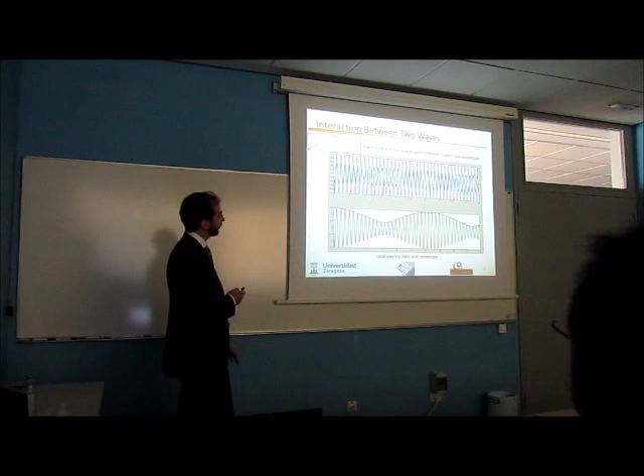To illustrate this situation, we show the electric field of two waves with different speeds and amplitudes, as in the ray tracing approach. And we can see that this is quite hypnotizing. Despite they move at different speed, when they go through this point, there is always full destructive interference. They have a phase delay of 180 degrees. And in this point, they are always in phase, constructive interference. So the period of this signal, which is a standing wave pattern, is simply the distance necessary to accumulate a phase delay of 2 pi.

In this work, we have adopted the modal theory approach for the reasons you will see later. Each mode is equivalent to a ray in the ray tracing approach. They are defined as the set of solutions to the boundary conditions of the waveguide and describe the arrangement of electric fields. They are indexed according to the number of maxima in the transverse direction. So the first mode has 1 maximum, the second mode has 2 maxima, and so on.

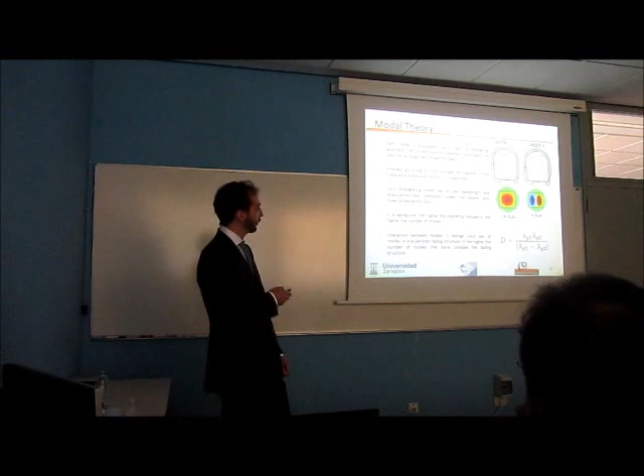Each propagating mode has its own wavelength and attenuation rate, and the so-called dominant modes are the ones with the lowest attenuation rates. In a waveguide, the higher the operating frequency, the higher the number of modes we will have propagating, and this interaction causes the fading. As in the previous case, we have multiple modes with different wavelengths interacting.

So it turns out that tunnels are modeled as rectangular dielectric waveguides, in which the wavelength has to be much smaller than the tunnel cross section to achieve communication range in the order of kilometers. This causes several modes to propagate, several interactions causing these fadings.

So in the literature, we have the near sector where multiple modes appear, and it's characterized by these fast fadings, and a far sector. Once the higher order modes attenuate, we have the lower order modes interacting, and this causes the slow fadings. In the literature, they say that sometimes they are periodic, sometimes they are not. And we are talking about fadings in the spatial domain. This is a signal that is stable in time.

So we were wondering, why are these fadings sometimes periodic and sometimes not? How can we obtain clean and predictable signals in this multipath environment, which we can use for navigation and localization? Are these fadings repeatable in different domains, space, time? How are these fadings in the cross-section? And how can we exploit this phenomenon?

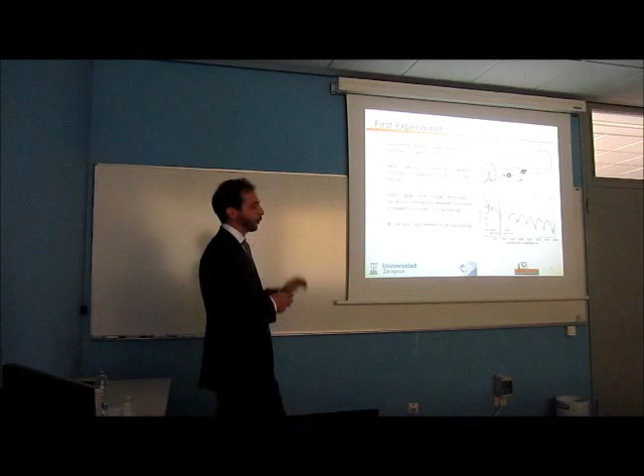So as a first approach, we put the transmitter antenna on one side of the tunnel and displaced the receiver up to 4 kilometers. We obtain this signal, which is quite nice. We observe, as in the literature, a near sector in which we can see the fast fadings, multiple interactions. Then we have a far sector with slow fadings, and in this particular case, at 2.4 gigahertz, we obtain these fadings with a period of 500 meters.

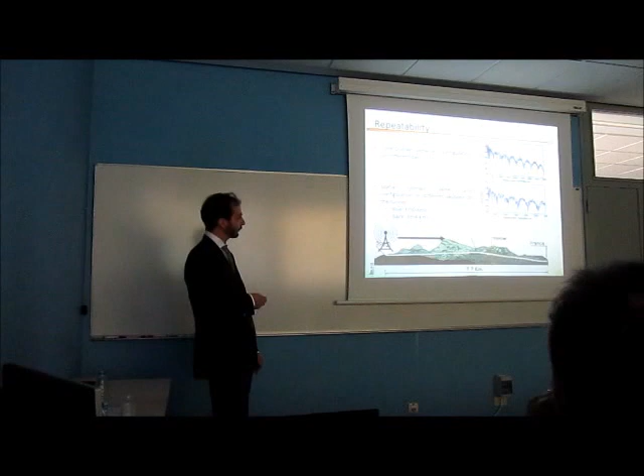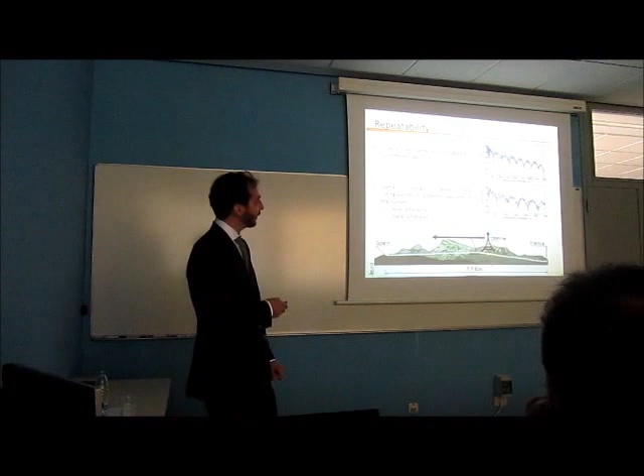So we were wondering if these fadings are repeatable. In the time domain, we use the same transmitter-receiver configuration on different days, and we can see that there is quite good matching between the signals. In the space domain, we use the same transmitter-receiver configuration in different sections of the tunnel. First, 3 kilometers from the entrance, and then 3 kilometers from the frontier. We didn't want to cross the frontier. And again, we can see how the signals, the power as a function of the distance to the transmitter, match quite well.

At last, we wanted to analyze the link symmetry, so we established bidirectional links, swapping transmitters and receivers. And again, we can see how the signals match quite well. So this is good news for our purposes.

Then we wanted to analyze the influence of both transmitters and receivers over the fadings. And to do so, we adopted the modal theory. So we modeled the tunnel as a dielectric rectangular waveguide in which the modes have a standing wave pattern in the cross-section. In the case of the Somport tunnel, due to the attenuation rates, the first three modes are the dominant ones, and each pair interacts and produces a fading structure.

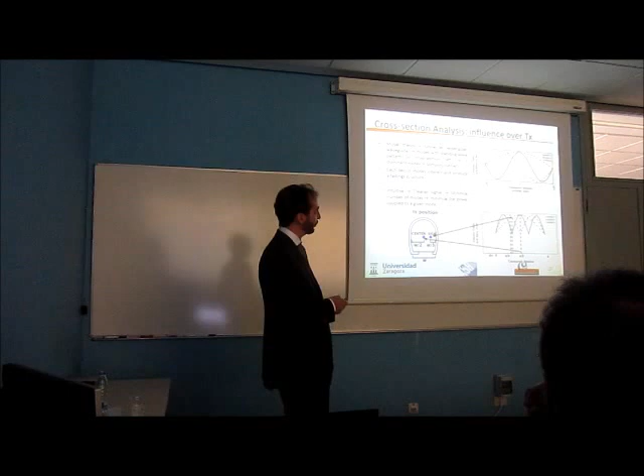So it's quite intuitive that to obtain a cleaner signal, you have to minimize the number of modes that interact to two, and that is accomplished by minimizing the power coupled to a given mode. So in this work, we have selected two positions: the center position that minimizes the second mode, and 1/3 from the tunnel wall, which minimizes the third mode.

So we place the transmitter on the side, transmitter on the center, and obtain these two signals. They are just shifted for clarity, they overlap. And we observe that they have different periods. If we go back to the formula of the period, we can see that it depends on the wavelength, and it turns out that in the tunnel, each mode has a different wavelength.

So in this case, modes 1 and 2 created periodic fadings of 500 meter period, and the first and third created shorter fading periods. On the other part, we place the transmitter in a place in which we have important power contribution of the three modes, and we can see how the signal is not strictly periodic. We have different fadings, different periods, so this is not as predictable as the others.

Then we analyze this phenomena at different frequencies. So we can see how at 2.4, 1.8 gigahertz, 868 megahertz, and 433 megahertz. Again, the same two positions, center of the tunnel, modes 1 and 3 in red, and side of the tunnel, modes 1 and 2 in blue. We can see that the lower the frequency, the lower the fading period, and the higher the attenuation rate. The periods match quite well with the rectangular waveguide approximation for this tunnel.

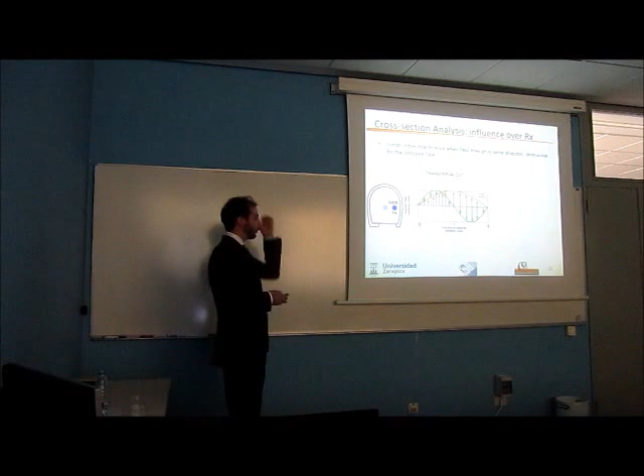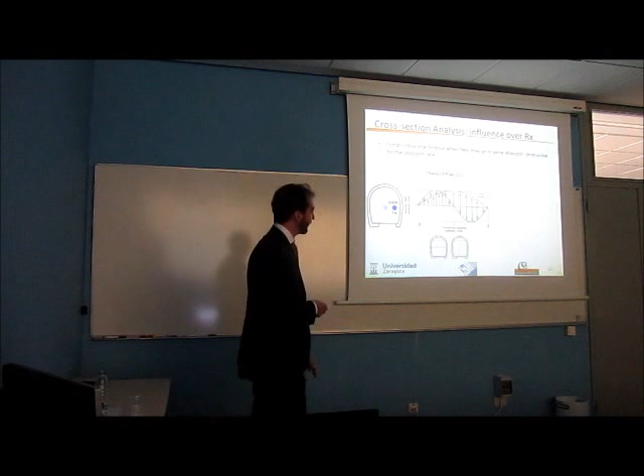So now we are going to interpret it with the electric field lines. So we see that if we place the antenna in the side of the tunnel, we have the first and second mode. What happens here? In one half of the tunnel, there is constructive interference, and in the other half of the tunnel, there is destructive interference. Remember that these modes oscillate in a wavelength distance, so it's going to be the same in the other positions. We place one antenna in each of the sectors, each half of the tunnel, and one antenna in the center of the tunnel.

We obtain the same 500 meter period of spatial delay as in the previous experiment at 2.4 gigahertz. And in the center of the tunnel, the mode has a minima, then the third mode becomes observable. But don't pay attention to this right now. So what is important is that the transversal structure is translating into a spatial phase delay between the phases.

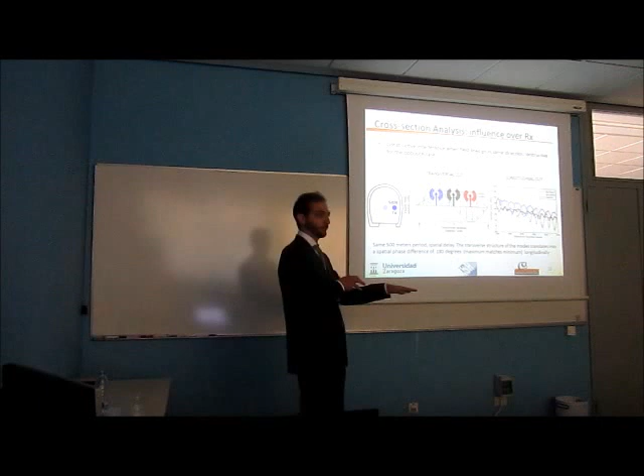Here we group the 12 antennas from one half of the tunnel and the 12 antennas in the other half of the tunnel. They are just shifted for clarity. We can see how in the same half the fadings have the same period, and the other half has the same period, and there is a phase delay between both signals. This can be clearly viewed with the upper view of the tunnel, so we can see that this half of the tunnel is in phase and has a phase shift, a spatial delay with respect to the other half of the tunnel. In a 3D space, this is more or less the situation. So one half of the tunnel, the other half of the tunnel, the period is the same in both, and they are shifted.

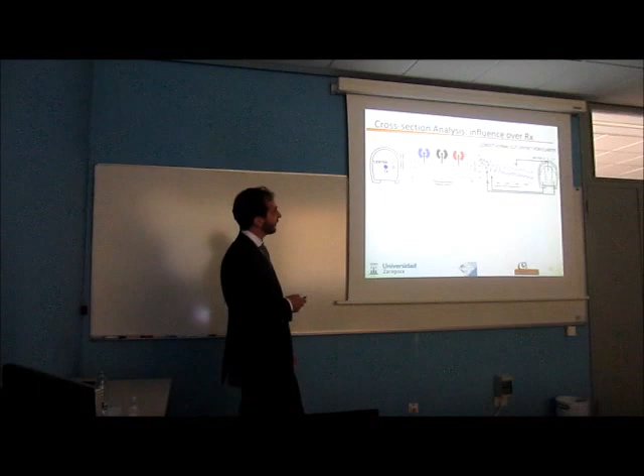We also see that if we place them in the center of the tunnel, we have the first and third mode interacting. So what happens here is that in the extremes, we have destructive interference while constructive in the center and vice versa. Again, we place one antenna in each of the sectors and obtain that the sides of the tunnel are in phase and they have this phase difference with respect to the center according to the spatial distribution. So, in the upper view, this is even more clear. We can see how the extremes are in phase and they have the phase delay with respect to the center. In a 3D space, this is more or less the situation again.

So in summary, to obtain clean and periodic fading, you have to promote the interaction between just two modes, and this is accomplished via the transmitter position tuning, minimizing the power coupled to the undesired modes. So we chose the center and 1/3 from the tunnel. And the transversal structure of the present modes actually translates into a phase difference of 0 or 180 degrees in the longitudinal phase.

So in this section, we study the longitudinal fadings, their repeatability, configurations to produce well-defined fadings, as well as the influence of the transmitter and receiver position on these longitudinal fadings. We also perform a study of the fadings in the transverse dimension.

So now, what can we use this for? Imagine a search and rescue scenario in which something happened inside the tunnel, humans are not allowed, and what do you do? You deploy a team of robots and stream data to a base station. For communication purposes, we have a multi-hop protocol developed by Professor Tardioli that Professor Almeida probably knows.

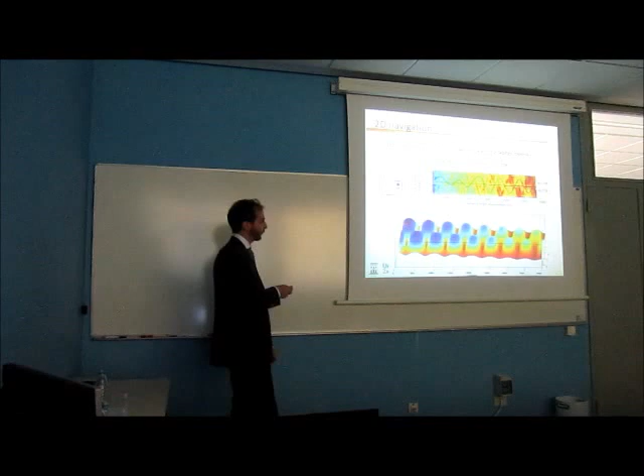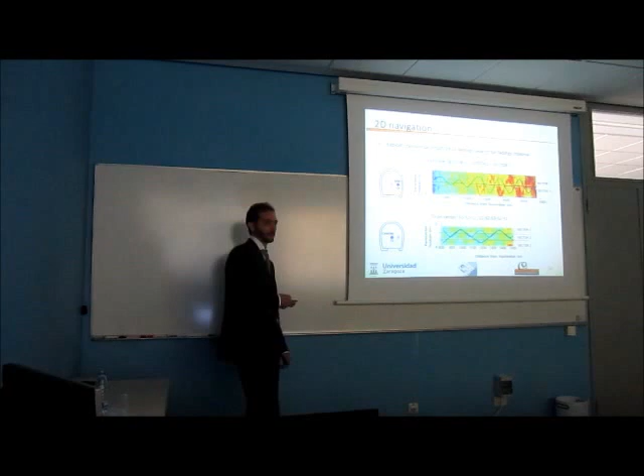If we place the transmitter in the center, then we have the tunnel divided in three, and we have the same situation as in the other, or we can do it in one half of the tunnel: first sector, center, first sector, center, or the combinations possible. This is for clarity, then we can see here how we have to go from one half of the tunnel to the other, going through the center, or within one half.

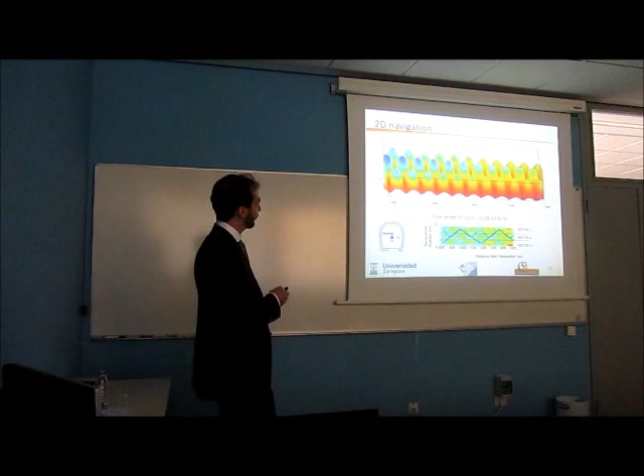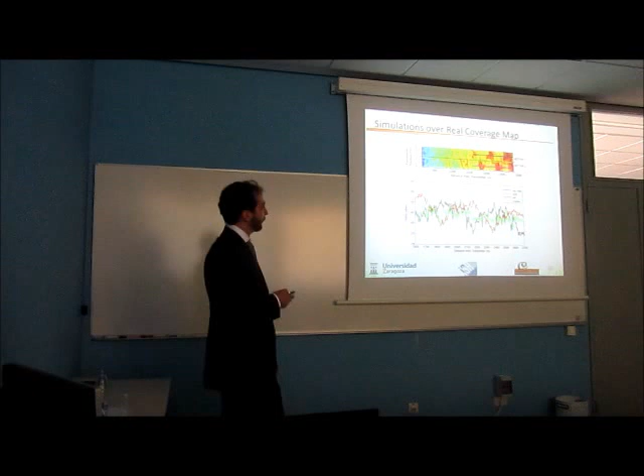So we did some simulations over the real coverage map built in the previous chapter. So we see that if we travel in straight lines in one half of the tunnel or the other, we see these 500 meters fadings. If we go through the center, we have the third mode, less fadings, but we could take advantage of the fadings maximum. So we can see how our zigzag navigation technique obtains the best quality links in comparison to all the other situations.

At last, we wanted to facilitate the navigation while improving the communication. So we proposed spatial diversity schemes. Let's remember that commercial spatial diversity is made to overcome temporal fadings. So they are made in the order of a few centimeters, one wavelength. However, in the tunnel, if we want to take advantage of this structure, we have to work in the order of half or 1/3 of the tunnel, which is decimeters to meters. So we have to implement large-scale spatial diversity schemes.

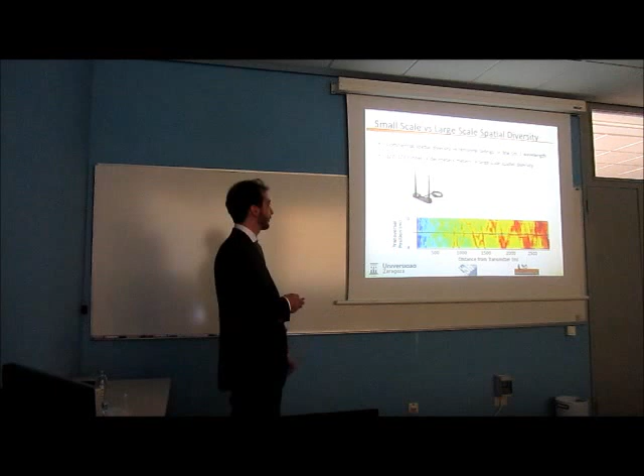In this experiment, we put two antennas together as in the commercial spatial diversity, and the other one far away. So we can see how the two antennas close together have more or less the same information, while with the other we have really different information. So what is actually relevant here is the position of the antennas, not just the separation between them. So we consider the case of having two halves of the tunnel, and what is relevant in this case is to keep one antenna in each half of the tunnel at all times.

Now we move into pipes, which is one of the other common tunnel-like environments. Actually, this was during a research stay at the University of Pennsylvania. They had a project for dam pipe inspections, and they needed to localize the quadrotor inside the pipe. So the problem with these scenarios, as we mentioned, is that they are much longer than they are wide. They are featureless in both vision and texture. They are repetitive, dark, slippery, so if you use wheeled robots, the wheels will tend to slide, and they are GPS denied. So all of this really hinders the accurate localization.

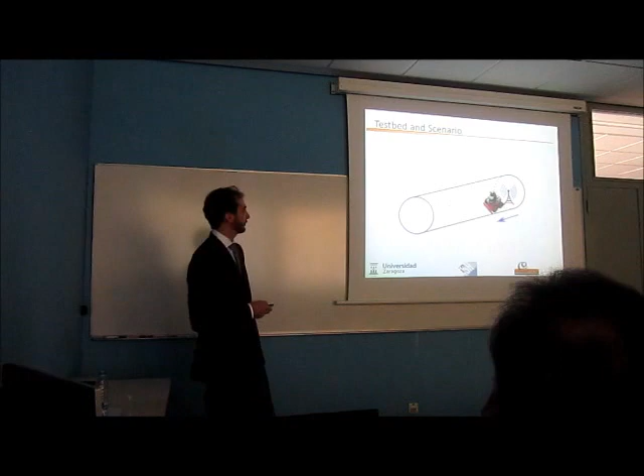So the procedure again was to place the transmitter at one extreme and displace the robot inside the pipe, measuring the received signal. So below the cutoff frequency, you choose a frequency which is below the first propagating mode, and we can see that there is a rapid attenuation. The pipe does not behave as a waveguide.

Then we selected a frequency between the first and second mode, so we are just propagating one mode. This is used for communication purposes because you obtain a clean signal with no fadings, but this wouldn't be useful for localization. There are some approaches that use the slope to localize in these scenarios, but the problem is that in metallic pipes the attenuation rate is of a few dB per kilometer, so you wouldn't be able to obtain it.

Then we studied that the interaction between the first and third mode, as in the case of the tunnel, will cause shorter period fadings than the first and second one. The problem is that when you propagate the first 3 modes, you also propagate the second one. So how can we get rid of this second mode? And we found the answer by analyzing the structure of the electric field. So the second mode has radial symmetry.

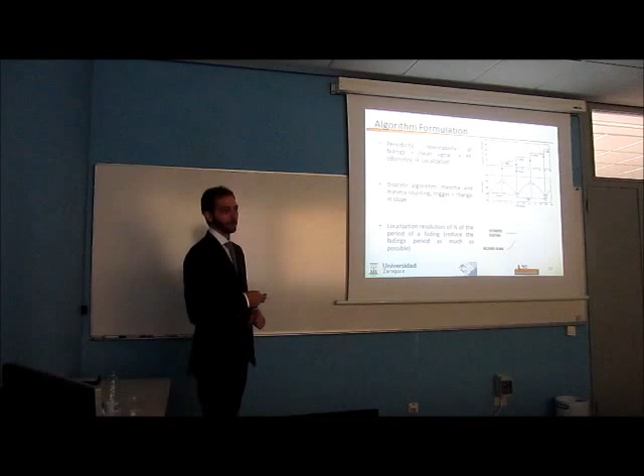At last, we said that we wanted to use these fadings to localize. As they are periodic, repeatable, and they are clean, we propose an RF odometry-like method for localization. So it's a discrete algorithm in which we just traverse the fadings and count the maxima and minima that have been traversed. So the trigger would be the change in the slope. This would give us a localization resolution of 1/2 of the period of these fadings. That's why we wanted to reduce the fading period as much as possible.

So what is important to say here is that we have two delays. One is associated to the moving average filtering. Although the signal is clean, we wanted to obtain a really clean signal, so we just added a 10 samples moving average filter. And there is another delay associated with perceiving the change in the slope: you have to traverse the fading. So actually, you know it after you traverse it.

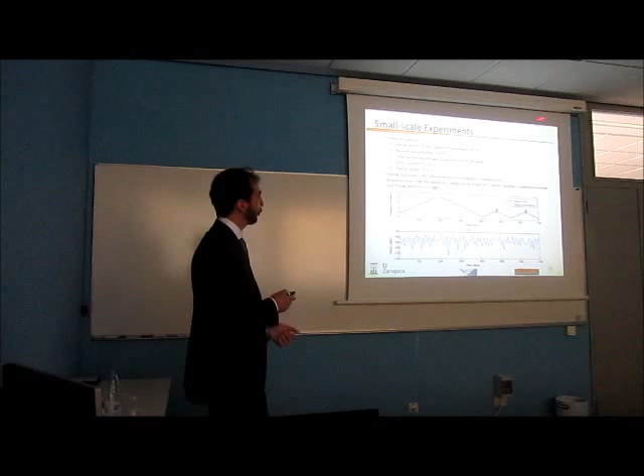As the fadings are stationary, there are no cumulative errors as in other methods like odometry. And the maximum error here occurs when you almost reach a fading, but you don't get to the change in the slope. So you don't get triggered, and it's 1/2 of the period of the fadings.

So to test these concepts on a more real scenario, we brought, with help of Professor Tucci, the Pioneer into the pipe, and we added structural landmarks each 10 meters. This was used to obtain a position estimation and ground truth for comparison purposes. So we can see how after 70 meters, the odometry accumulated a 6% error, while our method just 0.9% after the trigger.

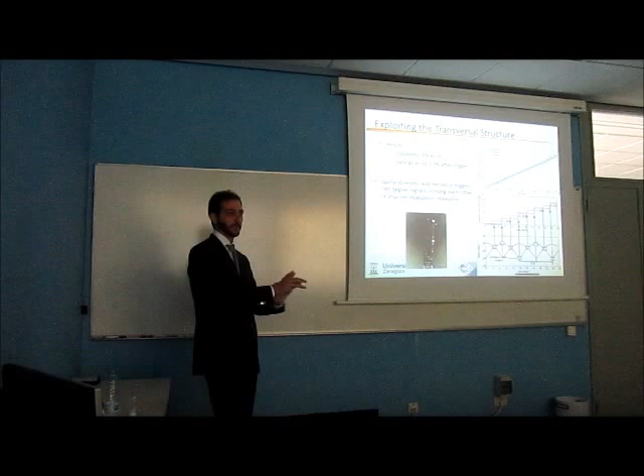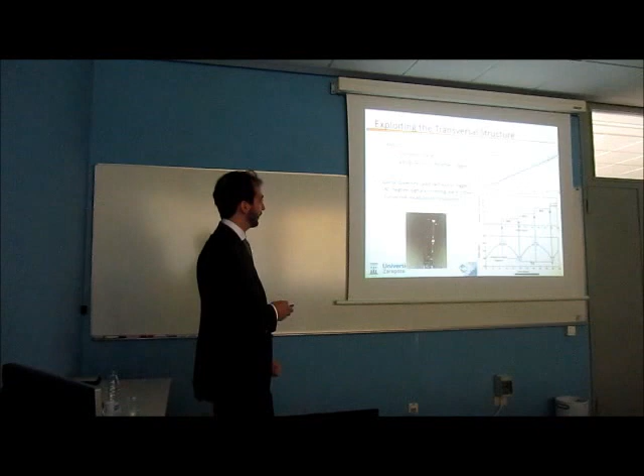But we wanted to exploit the spatial diversity here as well. So we can see that if we have one receiver in the upper half of the tunnel, while the other is in the lower half, we will have delayed signals, and we can add two more triggers where the signals cross each other. So this would allow us to improve the localization resolution, and we can see how there are the two signals. We have much more triggers and much more localization resolution.

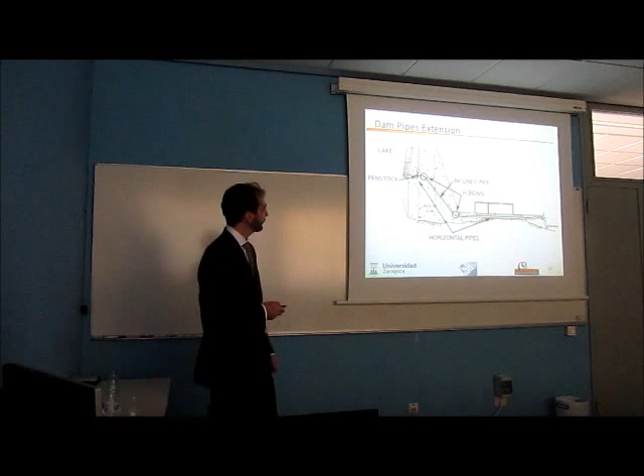So we wanted to contribute with them, and it turns out that pipes inside dams have different characteristics. So they have elbows, and they have one end closed, which is the penstock that prevents flooding the pipe. And we wanted to analyze if our method would work in this situation. So we used several pipes with different elbows: 90 degrees, straight pipe with 90 degrees, a corrugated pipe that is used for fan structures with 90 degrees, 90 plus 90 degrees, and 90, 180 plus 90 degrees.

So we can see how in all the cases, the period of the fadings is maintained before and after the elbow, and they match the theoretical period of the fadings. It seems here that this fading has a much more spaced period than this one, but no, it's because in this one we had less distance to cover, so it's the same period.

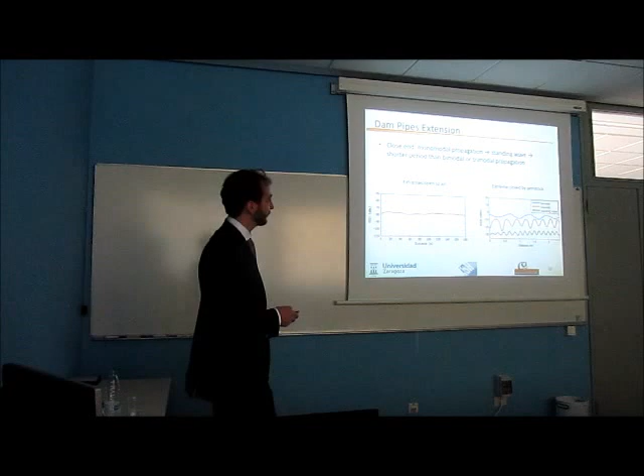And as for the closed end, we actually see the opportunity to use a standing wave pattern due to the monomodal propagation. So if the extremes are open to air in monomodal propagation, we have just one signal with no interference. The thing is that if we close one end, then we have an incident and a reflected wave, and it causes these fadings. So we can see how actually in this case, the standing wave period is shorter than the case of bimodal and trimodal propagation. So we could improve the localization resolution even more in this case.

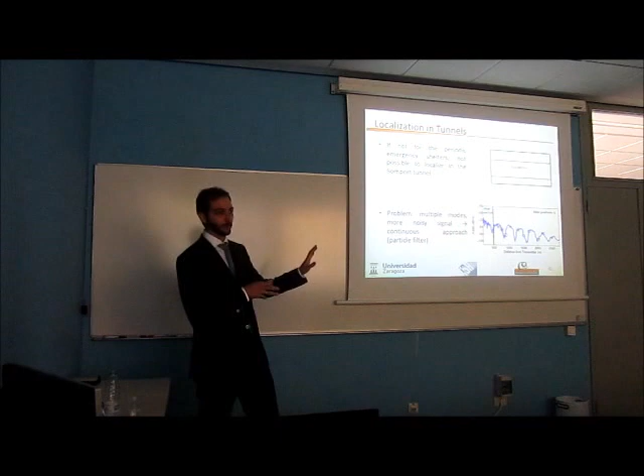To close the loop, we go back to tunnels because this could help us to localize in the tunnel as well. Actually, the only reason why we could localize in the Somport tunnel is because we have lateral galleries each 25 meters, which are really characteristic of the Somport tunnel. I haven't seen this characteristic in other tunnels. So the problem in the tunnel is that we have more modes interacting and the signal is noisier. So simply detecting the change in slope wouldn't work.

So we did our first test here, placing a receiver with an onboard computer on a hexarotor and traveled a distance of 550 meters, recording the received signal. We can see here how the signal in both experiments matches the simulations of the same signal propagating in a rectangle using the rectangular waveguide approximation. And they match quite well. So this makes us believe that if we include these simulations using a particle filter approach, for example, we will obtain good results.

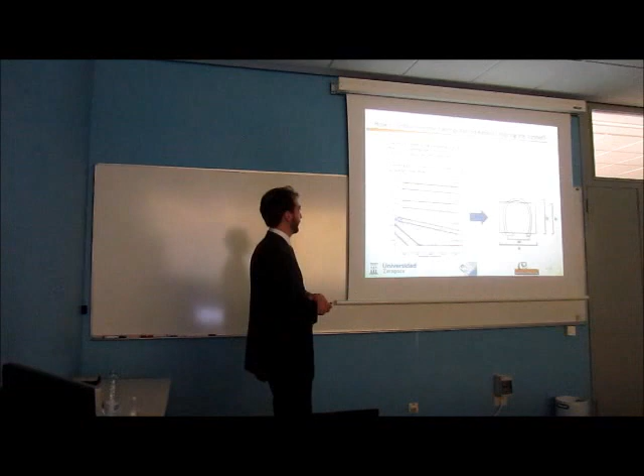The last question would be, how can we determine the fading period before entering the tunnel? In the pipes, it's quite straightforward. You have the diameter, you know the frequency you're going to work at, and you obtain the fading period. In tunnels, what they do in the literature is a measuring campaign, they find the attenuation rate, and that gives you the dimension of the equivalent rectangular waveguide, which is not the same as the real shape. So in an emergency situation, you will have no measuring campaign available. I mean, besides the Somport tunnel and Golden tunnel, I don't know if they have these measuring campaigns.

And on one side, the finite element method has been considered memory demanding and time consuming. However, we found that the propagation constant, which translates into the fading period, can be obtained through a 2D analysis, just with the cross-section of the tunnel, imagining that the tunnel is regular.

So we use the actual profile of the Somport tunnel, placing a laser sensor on the floor, and results from other tunnels from the literature. So we can see how we compare the experimental results, rectangular waveguide approximation, and the finite element method solutions. So we could see that actually the finite element method solutions are more accurate than the rectangular waveguide approximation.

So this is quite a big advantage because it means that you can get inside the tunnel, in the entrance of the tunnel, place a laser sensor, scan the cross section, and you know how will be the fading period. So in this chapter, we present a localization technique that offers an alternative to standard techniques by means of exploiting these periodic fadings, and we validate the rectangular waveguide approximation.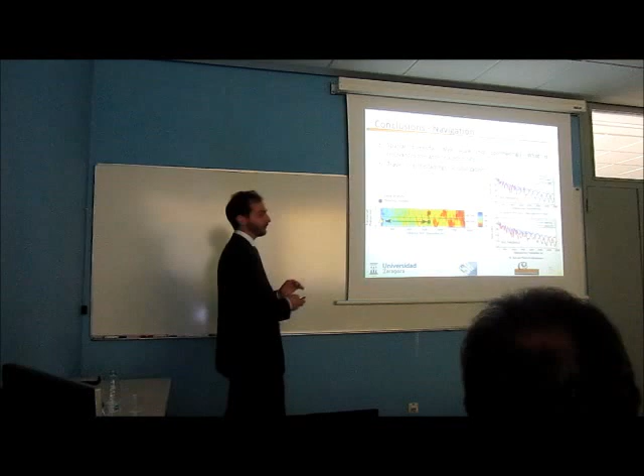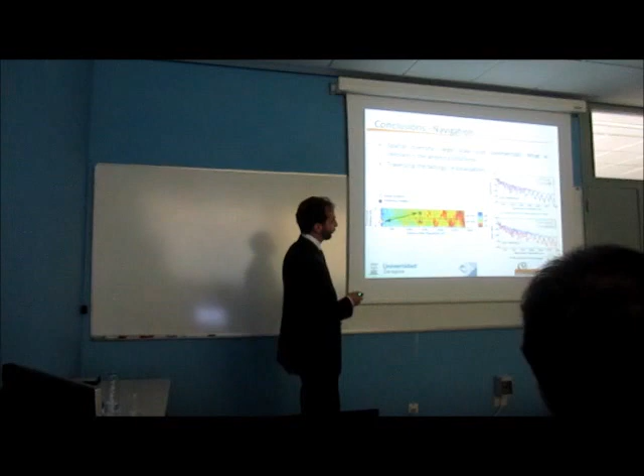For the 2D navigation, we have one single robot with one antenna, and you have to do this zigzag path depending on your transmitter setup. For spatial diversity schemes, we propose a large-scale spatial diversity scheme in which what is relevant is the position according to the propagating modes. And again, as you are traversing the fadings, you could use them to localize. So in this approach, you can use the fadings to localize while keeping the link quality above the threshold.

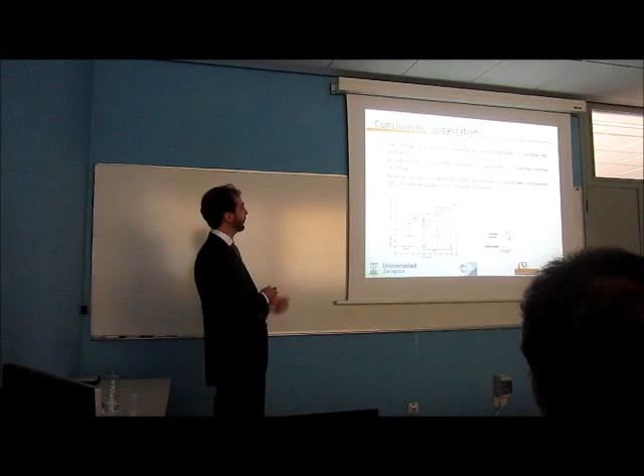As for localization, the fadings are periodic, repeatable, and predictable, which makes them suitable to localize. So we have proposed an odometry-like method, which is a discrete algorithm traversing the fading and counting the number of maxima and minima. And we can also use this method to reset the errors accumulated by other techniques, such as visual or wheel odometry, or even an IMU. So this would be an in-tunnel equivalent to GPS plus IMU systems.

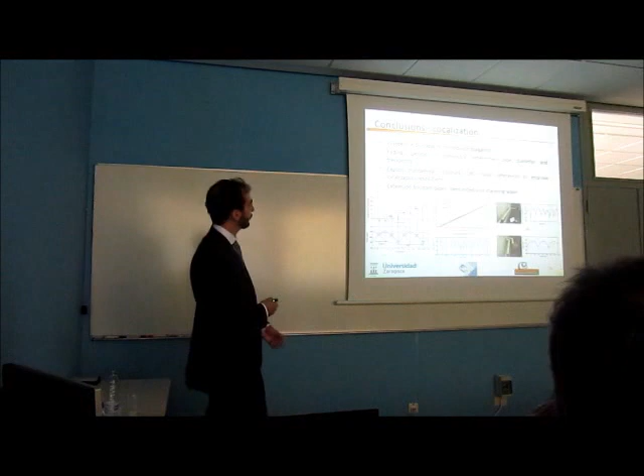In pipes, we can use bimodal or trimodal propagation to produce these clean fadings. The fading period is previously determined with the pipe diameter and the operating frequency. That's all you need. We have exploited the transversal structure to improve the localization resolution, and we have made an extension for pipes in which we study bent pipes, the period is maintained, and we can exploit the standing wave.

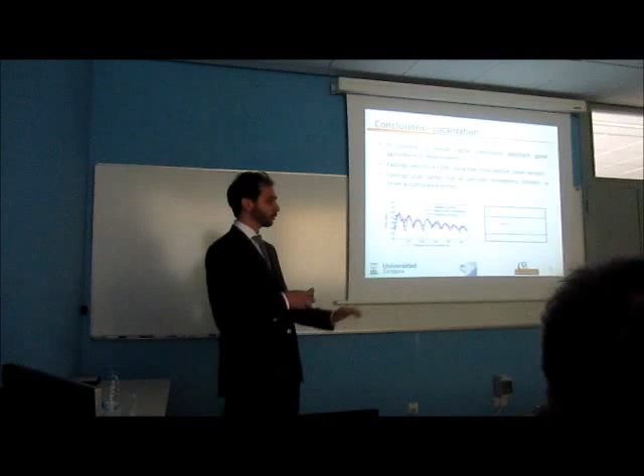At last, in tunnels, the signal is noisier, so we have to work in a continuous approach, which we believe we can make due to the agreement between the simulations and the results. The fading period using the finite element method could be obtained by placing a laser sensor in the entrance of the tunnel, and the fadings here would play the same role as the periodic emergency shelters.

So this sentence more or less summarizes all the work. All the fadings in these confined environments are unavoidable, and they are usually considered a serious problem for communications. We have shown an interesting way to address this issue by generating and detecting non-geometric periodic fading structures. We have also demonstrated how to navigate to deal with these fadings in a communications-aware context, and how to benefit from their periodicity to localize in these challenging environments.

So as future work, we are already implementing the particle filter approach in collaboration with Innova, obtaining good results. Localization in tunnels is just proposed for the moment, but we believe that this same approach would yield good results. And also, if we change the antenna polarization, we have to shift all this presentation to the other dimensions, so we could use flying robots to exploit this diversity.

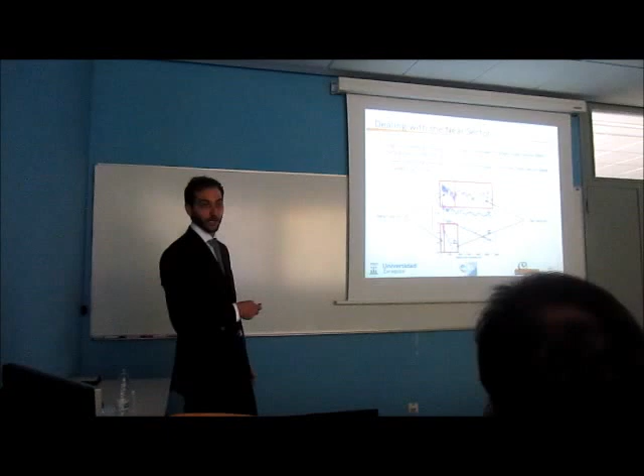So it's known that higher operating frequencies are related to a longer near sector because we have many more propagating modes, while lower frequency signals have a really short near sector. So what we propose to overcome this problem is to use two signals. To cover a large area, you can use a high frequency signal which has an associated long near sector, but we could use a lower frequency signal to localize within this near sector. After you overcome the near sector, then you can localize with the higher frequency signal. Okay.

And in the far sector, in the slow fadings, why can you not use the shape, the increasing or decreasing value of the signal, to obtain a more precise localization, lower than the half period?

Yeah, actually this signal you can filter more or less. The half period of the fadings in tunnels covers much longer distances, so we will have a poor resolution, and you have these false positives which will enter this algorithm. So what we are working on right now with people from Nova is implementing a particle filter that uses the propagation model to fit the data.

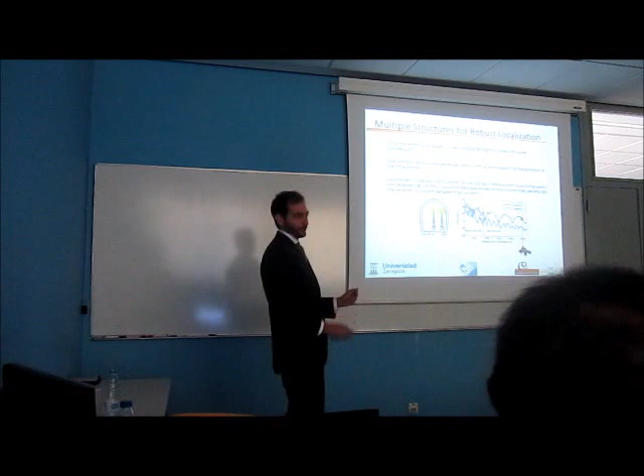But would it be possible to come up with a scheme that would provide you absolute localization? For example, using multiple frequencies at the same time. Yes, of course. And actually I see that more feasible in tunnels because the attenuation rate is higher. Let me go for a slide. So what you were saying is more or less this. We propose multiple structures for a more robust localization. In this case, we would use both transmitter positions that we study in this work, and by multiplexing in the time domain, you could perceive both structures with just one receiver.

And using that figure, one thing that bothered me: how do you, in an automatic way, separate the near from the far sector? Because it's kind of foggy, or fuzzy. Yeah, we still have to work on that. You could analyze the signal. The near sector has these fast fadings, so you could analyze, like a zero crossing, how many variations you are getting in a period of time, but it's still diffuse there. So another potential application that came to my mind as I was reading, there were some similarities with some modulation techniques, like for example OFDM, that allows us to send multiple bits at the same time.

That's why we increase the bit rate, because it uses several carriers that, when they are convolved with the bandwidth, create a sinc, and then they are displaced so that the zeros of ones are on the maximum of the other ones.

So I was wondering whether you can have multiple communications at the same time just by adapting the position. You could, for example, put several robots along the way, so that some robots will communicate with a transmitter, other robots will communicate with another one. Maybe they can also switch, but this could create parallel channels so that they could communicate in parallel at the same time, by putting them where it's zero for one and maximum for the other one. Would this work? This could also be interesting.